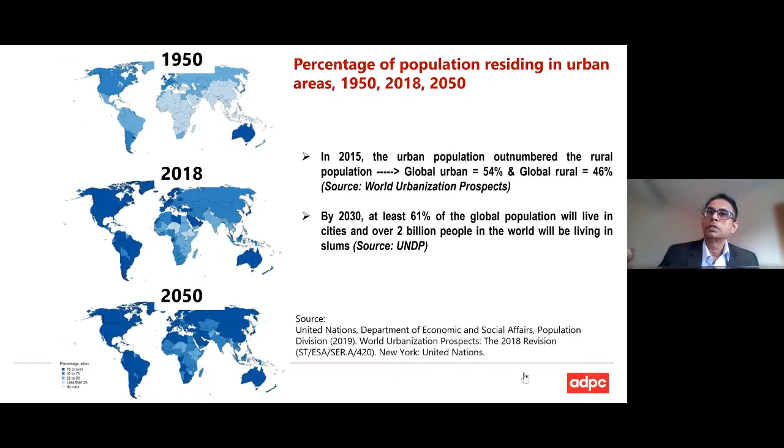So it is very much important for us to think about urban settings, because of the population increase, the growth, as well as the infrastructure, in order to understand and reduce climate as well as disaster risks. So there are a couple of global instruments, what we call global frameworks.

When it comes to disaster risk reduction, probably you all know the Sendai Framework for Disaster Risk Reduction. It was ratified by many governments in 2015, so we have a 15-year period till 2030. It has set four priorities: understanding risk, strengthening disaster risk governance, investing in disaster risk reduction, as well as enhancing disaster preparedness for effective response.

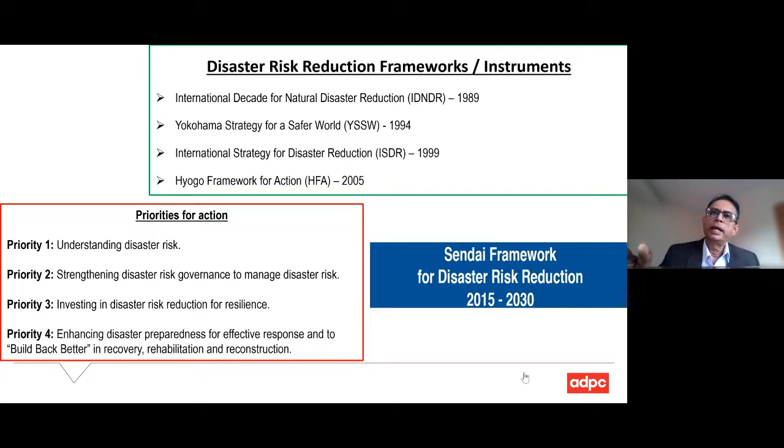So with that, there are a couple of other global frameworks. Everybody knows about the SDGs, Sustainable Development Goals. I've just selected Goal 11, because there are 17 of course. That one talks about cities, and if you take Goal 13, it is climate action.

Let's try to understand what a disaster is. Hazards are of course coming, and in future we are expecting them to be more intense and frequent. It also depends on whether the system is susceptible, if the exposure is high, and if the coping capacity is less, there is a risk. So hazard is coming, and if the system is more vulnerable, more exposed, and has less capacity, that's a risk of disaster.

And if there is any disaster, it leads to losses in lives, lifeline facilities, livelihoods, as well as assets. So this is the popular equation.

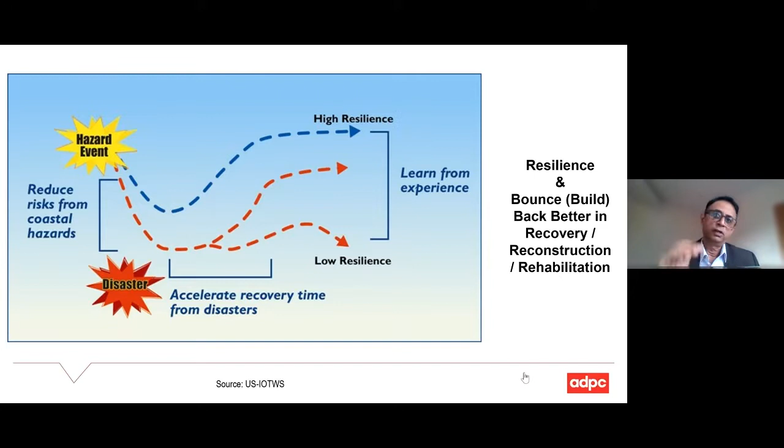If the system is resilient, it doesn't take much time to bounce back to normal level. But if the system is not resilient, it takes more time to bounce back. Sometimes it may not even come back to the same level.

This is the disaster management cycle. You can see the first half is risk management, with certain activities we can take forward to protect, starting with mitigation and prevention, and a lot of preparedness measures. One good example is prediction and early warning systems for national or subnational organizations to issue forecast warnings in a timely manner.

After the disaster, the latter part is crisis management. Once it happens, impact assessment is needed, and the government, CSOs, and other people deploy response mechanisms. Then we need to work on recovery and reconstruction, and with the learning from that, we go back to the protection side.

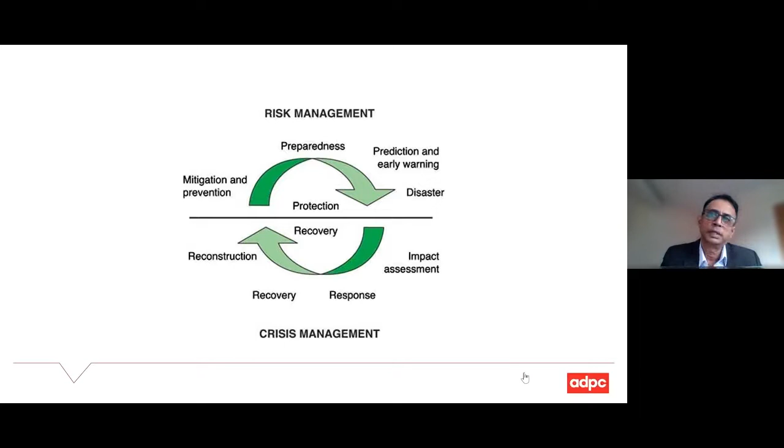As I was trying to mention, we can reduce the risks and protect the people, systems, or infrastructure in a particular area, or in this case, the urban setting. Let's assume in a particular urban area we have SMEs, people, critical infrastructure, or even in suburb areas, the farming community.

As I was trying to explain, these are risk environments. Hazards are there - it could be floods, riverine floods, storm surge, or coastal flooding if the city is near the coast, and strong winds associated with cyclones, or to a certain extent, drought as well. The exposure pattern is also important.

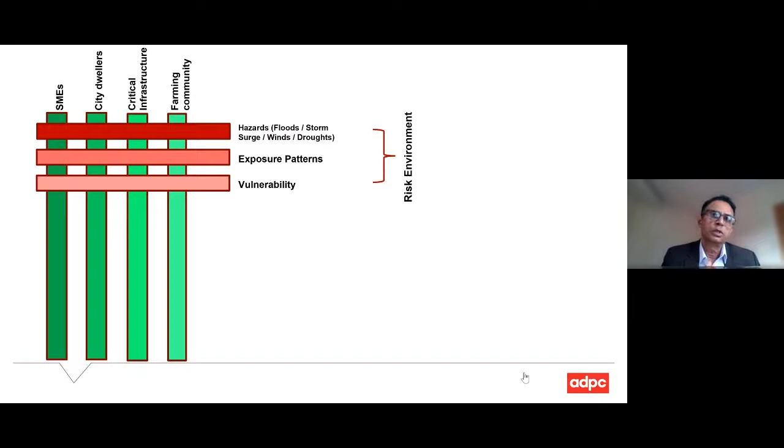In addition to that, there's the vulnerability of that particular system. These are some resilience-building measures. If you want to improve the systems or resilience, there are ways and means to do so. The most important thing I would say is the governance system - maybe people have been working so hard, but if the particular municipality or local area's governance system doesn't really support it, we may not be able to do much.

Land use management good practices are one way we can think of to reduce risks. And early warning systems - of course each country or city has them, but maybe the warning information doesn't really reach the grassroots level on time. So there are gaps, especially from sub-national to local level.

So we need to make some improvement and get private sector engagement in order to improve early warning systems, and build up area environment improvement. This is very much a topic nowadays - we've been talking, and other speakers might also talk about green cities, the concept, and economic opportunities. If you take this all, that is actually very much on urban disaster risk management.

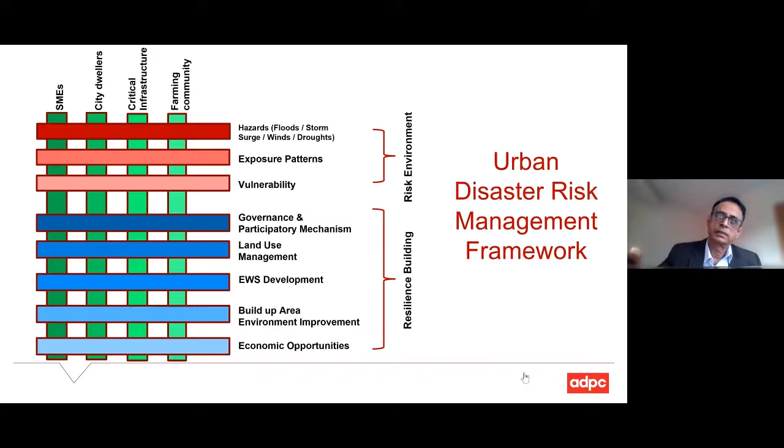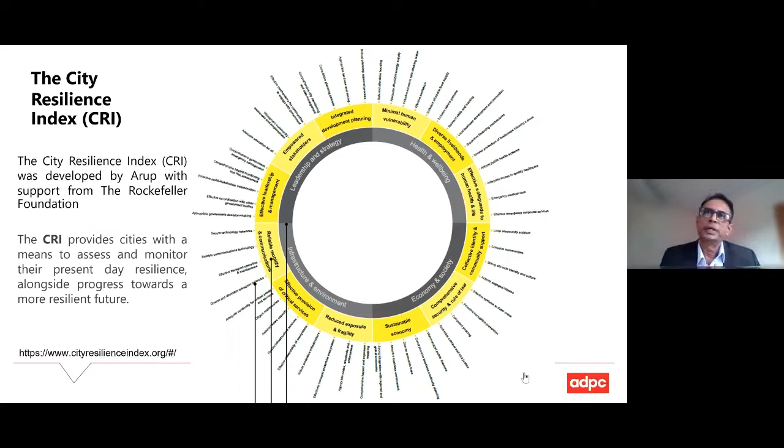This is the framework we have been using to make improvements and reduce the impacts, the risks. I thought of putting this one because I started talking about resilience, city resilience. The city resilience index was proposed by ARUP with funding from Rockefeller. It's a way to measure overall resilience. There are 4 domains, 12 goals, 52 indicators. It's a bit messy, you may not see it very clearly, but this is the overall resilience measuring index.

What I'm going to present now is one of the projects in the Disaster Preparedness Center we have been implementing with funding from NORAD - urban resilience to climate extremes. We have come up with some areas of intervention: improving early warning systems, improving community engagement and readiness, and sectoral preparedness and risk governance. These are the key 4 areas we have put in this project in order to improve.

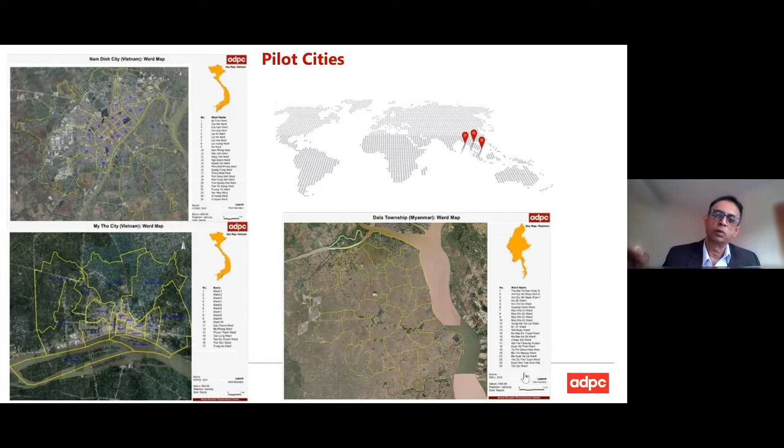It's also important for us to work on knowledge products and peer-to-peer learning, experiences among and across countries. So we have selected a couple of cities - 2 cities in Vietnam, My Tho and Nam Dinh, one to the north, one to the south, but these are all coastal cities - and one in Myanmar, in Yangon. These are the selected areas.

In addition to that, this whole project - it's important for us to exchange knowledge or lessons learned. So we have been conducting several webinars like this one, and we have conducted some trainings as well.

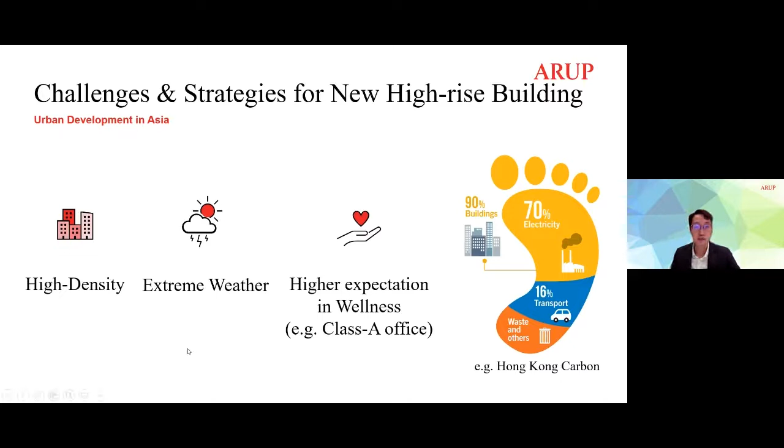So a bit of recap on the sustainable development of the building or urban context. In the year 2000, that millennium year, we focused more on energy efficiency. Then came the next 10 years where we looked at high performance - how we make use of space, how we make the best use of energy to provide the best environment or environmental quality.

And in the last few years, we've paid more attention to people-centric design of the building. You may have heard of the WELL building certification, or we focus on the topic of health and well-being design in the building. And in the recent 1 to 2 years, more of the general public have gained awareness of climate change. So I think this will be the era where we need to look at climate-centric design of a building.

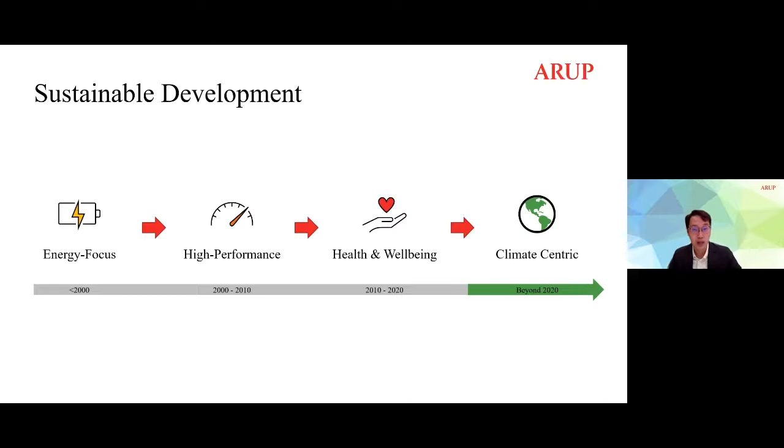So for the new generation of sustainable buildings, I think we need to look at three key elements. One is regarding resilience - how it responds to climate change, how we adapt to the climate change consequences. The blue one is mitigation - we also try to limit the global temperature rise and conduct decarbonization exercises. And the green one is adaptation - how we live together with the change of climate, and also how we change our design and behavior so that it can facilitate the wellness design of a building. So these are three very key elements in the coming years for new building projects.

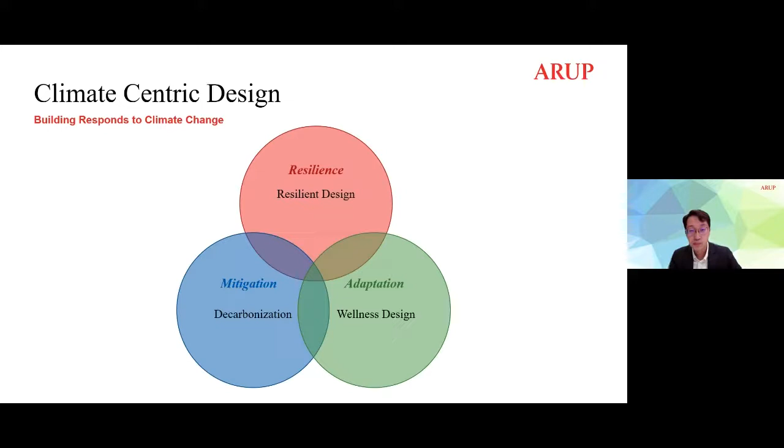So today I'd like to share a case study with all of you. It's a high-rise building in Hong Kong called Swire 2 Taikoo Place. It's an award-winning project that was awarded the Grand Award of the Hong Kong Green Building Award 2021. It's located in Hong Kong - an office building with 42 stories and 15 stories of basement levels. It's targeting certification for BEAM Plus New Buildings, which is the local Hong Kong green building certification, as well as the US-based LEED certification and the WELL certification, targeting platinum. We have already achieved the provisional and pre-certification, and the remaining item is the RESET Air, which is more about the performance of air quality.

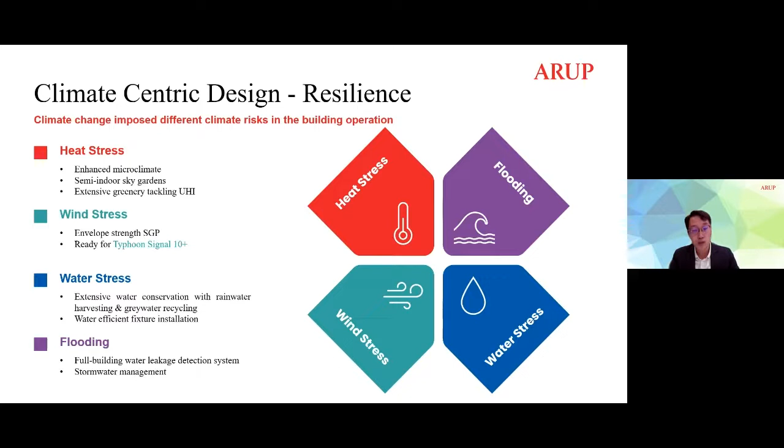So about the wellness design, which is the very high demand from the user nowadays for the urban context. There's mainly two parts in the wellness strategy here in this project.

One would be we call the COVID alignment design, which have a series of the touchless experience. Here is an example that we have the total touchless toilet, for the process that open the main door, cubicle door, or also the flush or the toilet lid. So all are touchless. We integrate this kind of system in the toilet interior design.

And also at the right hand side is very important, is the air quality, which is quite important in Hong Kong here, that's the urban area, where the outdoor air quality may be a concern. So apart from the filtering system and the fresh air system, the HVAC provision, we also include a series of the indoor air quality monitoring throughout the whole building, so that we can have a precise appreciation of the air quality, so we can provide the quick response for those areas where the air quality cannot provide a good performance, so that we can do some control, like the control of the fresh air amount or the air purifier.

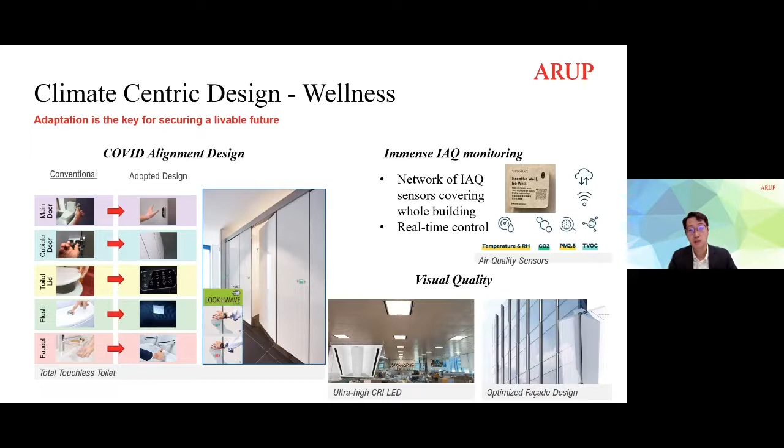And I've just mentioned there are 2 sky gardens put in the building that provide the area with the connection to nature, with the natural ventilation, the greenery, and the view. So that would be the space that can let the user have some leisure activity, and also during office hours have casual discussion there.

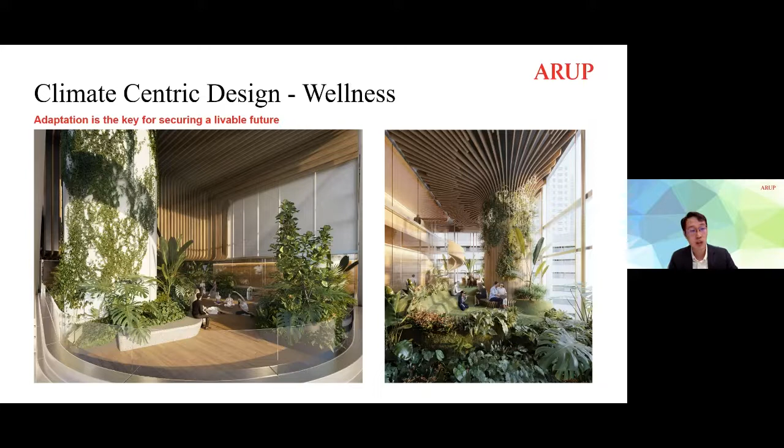So starting with the mitigation, the decarbonization. I'd like to introduce the terms of the whole life cycle carbon assessment that we conduct in this project.

And for the operational carbon, we certainly need to look at the passive design, that's how we work well with the microclimate, and also a series of energy efficiency systems and renewable energy systems, which I will touch on later. And also it's very important to look at the waste management system as well.

During the construction stage, that is also very important, because in the design stage we have specified lots of the materials and systems, but actually during construction, say 4 to 5 years, some materials that we expect may not be available at that time and moment. So we need a very good tracking system, checking on the materials submission from the contractor, so that all the project team can check on the performance. For example, at some juncture of time, the expected concrete from nearby is not available, so we need to buy concrete from a very long distance, and then that will introduce a larger carbon emission. So we should have a very good tracking system to see how the carbon emission performance is at the moment, so we can find any other chance to do it better and make it on track.

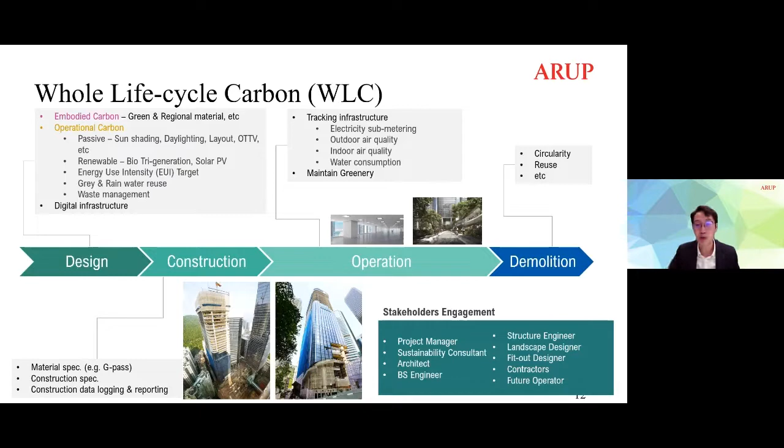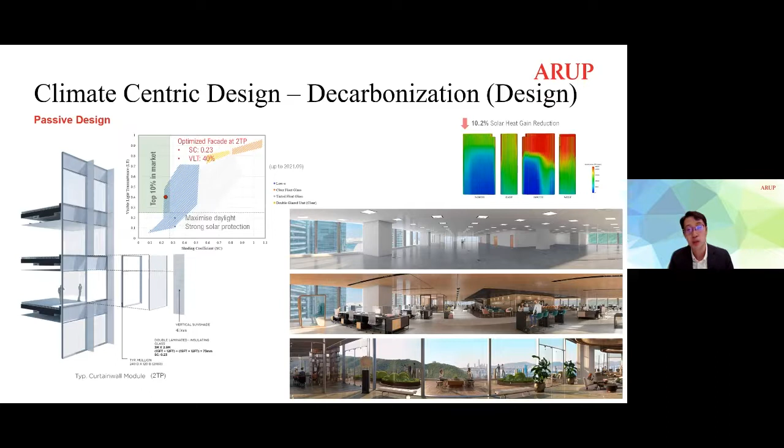So it's quite hard in subtropical Hong Kong to use solely passive design to offset the operational carbon, so that we still need to turn on the air conditioning in the hot and humid season, and also turn on the lighting. So that will be a series of energy efficient systems we consider, no matter in the water side and air side of the HVAC system, and also the lighting and lift and escalator system.

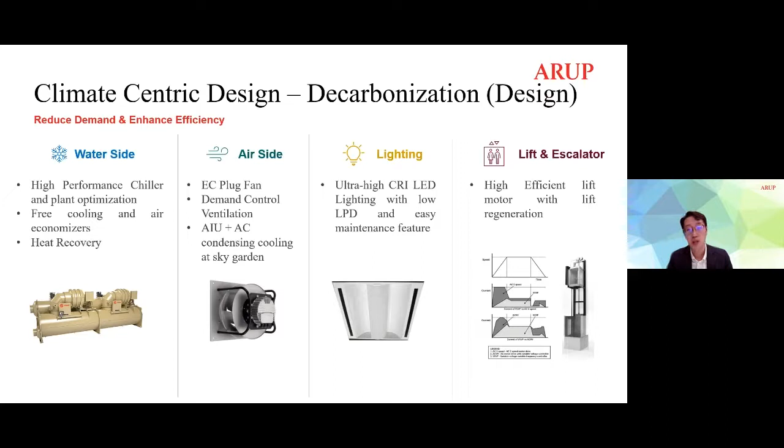The challenge in high-rise buildings is the application of renewable energy, since the roof area is quite limited. So apart from photovoltaic and small wind turbines we apply on the rooftop, we also apply the new concept of using waste cooking oil as fuel. That drives the generator to produce electricity and also heat, which can feed the absorption chiller to provide cooling for the building. That's why we call this a tri-generation system: making use of biodiesel, that is waste cooking oil, to produce clean electricity and also drive cooling and hot water.

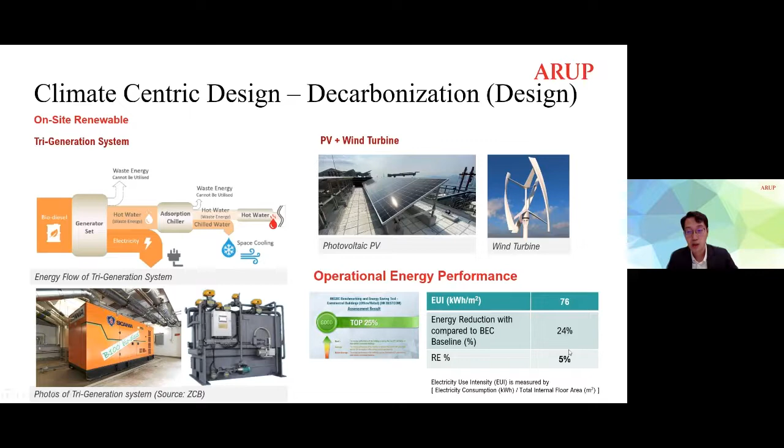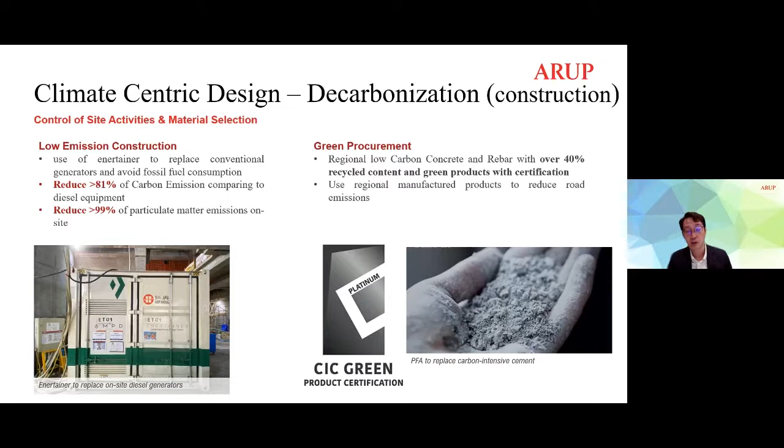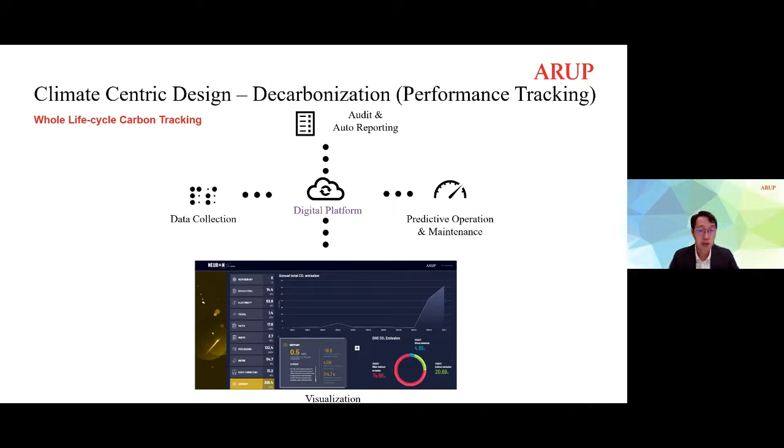Finally, for the operational stage, we have a performance tracking digital system to monitor each carbon emission parameter, to facilitate the operator observing the performance of carbon emissions of the building in the future.

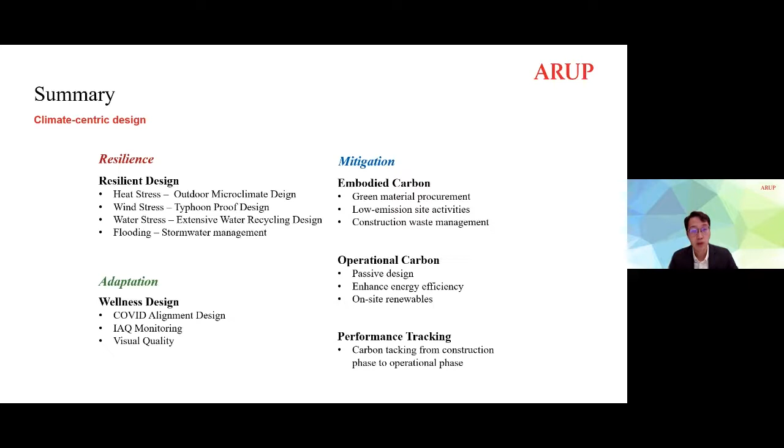So to close up, this is climate-centric design. We consider three main elements: resilience that responds to climate change, adaptation in terms of wellness design, and lastly mitigation, which considers embodied carbon, operational carbon, as well as performance tracking in the operation stage. So thanks, that's my presentation.

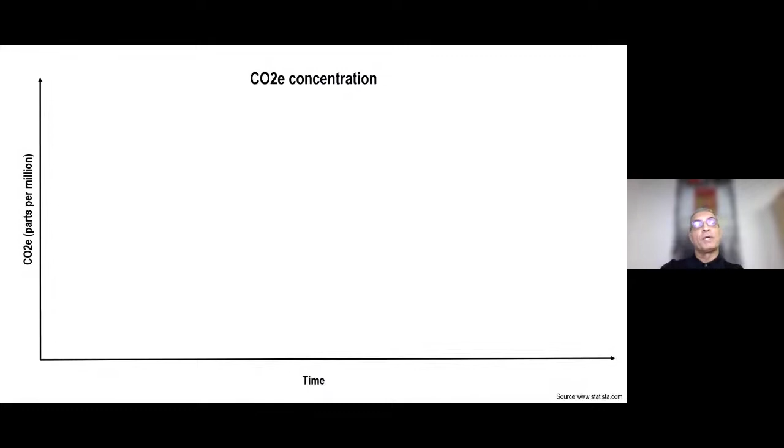Looking at a few drivers, environmental parameters before and after the Brundtland Report, say the CO2 equivalent parts per million, the famous graph of density going up, it's been rising for the past 800,000 years.

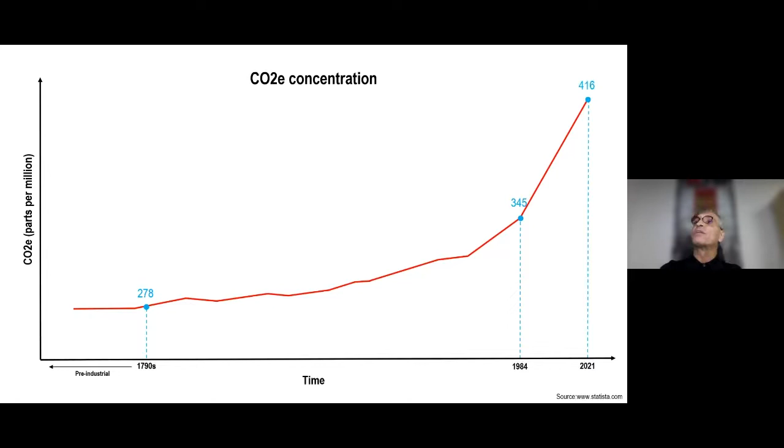Of course it's not the fault of the Brundtland Report. But looking at the past 200 years: in 1790 the number was 278 parts per million, in 1984 it was 345, and now in 2021 it is 416. In about 190 years between 1790 and 1984, it went up by 67 parts. In the preceding 35 years, only 35 years since Brundtland, it's gone up by 71.

The tendency on the right-hand side of this graph, after the Brundtland Report line, is worse than the one before.

Sarah Ichioka and Michael Pawlyn, in their fantastic book called Flourish, intimate that something like 50% of all the greenhouse gases humanity has emitted into the environment has happened after the Brundtland Report.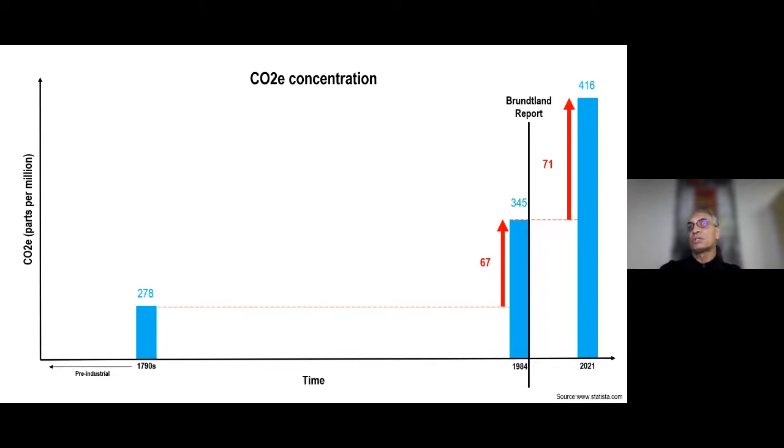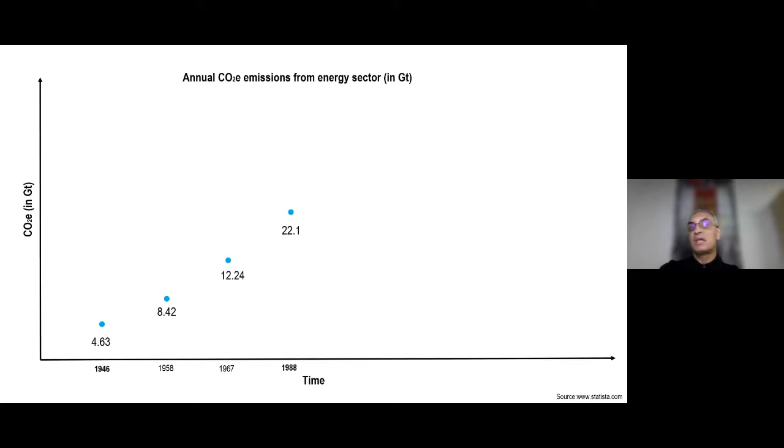Looking at the actual absolute numbers of greenhouse gases in gigatons related to the energy sector, which is a major part of total greenhouse gas emissions: just after the Second World War, in 1946, it was 4.63 gigatons per year. It continuously went up. In 1988 it was 22.1, and now it's about 36.4, coming up to 40 gigatons. You could draw a straight line through it.

And where you draw the Brundtland Report line, the tendency before and the tendency after show no difference. There is no discernible difference in our behavior, in our actual work to reduce our adverse impact on the environment. There's no change noticed in the data and the facts.

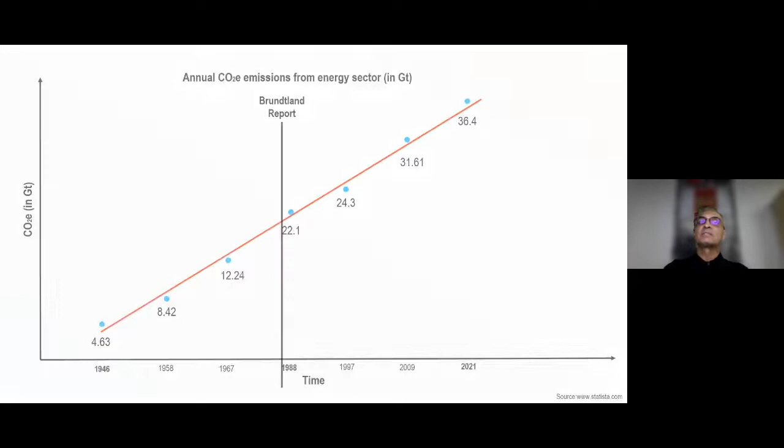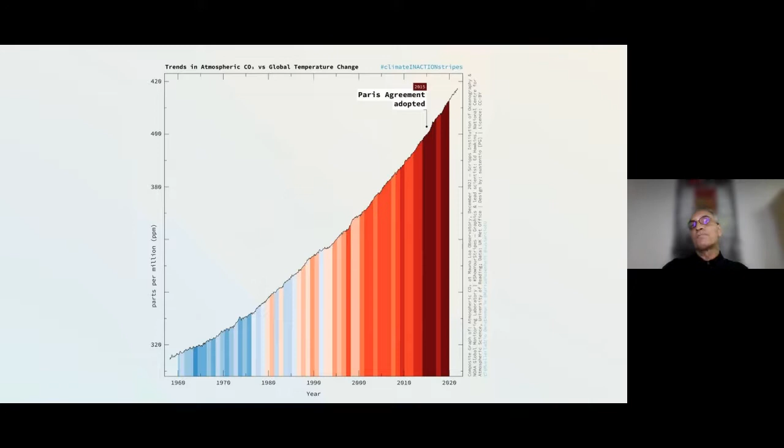The graph that you've all seen, again parts per million, going back from 1960 till now, shows various initiatives by very good, well-intentioned people: the First World Climate Conference in 1979, the first IPCC report in 1990, the first UN Climate Change Conference in 1995, the Kyoto Protocol, the Copenhagen Accord, the Paris Agreement, and as recently as last year, COP26.

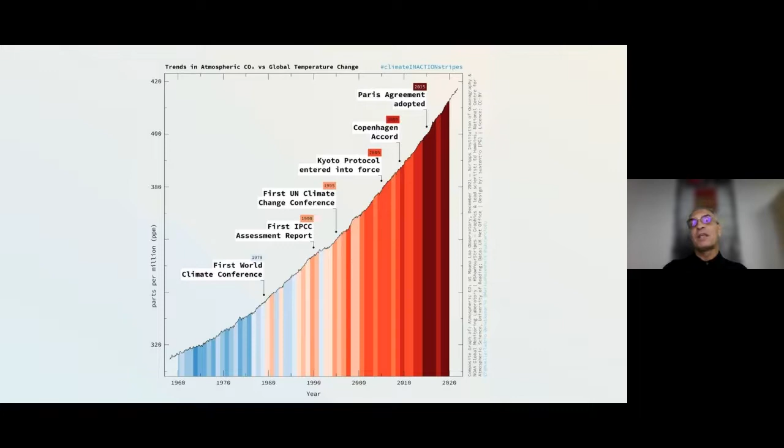You see, all these initiatives are happening as if on a different world, on a different graph. The impact on the environment is not discernible alongside them. I just wonder whether we are deluding ourselves that the work we're doing is actually getting us any closer to a proper solution to our environmental woes.

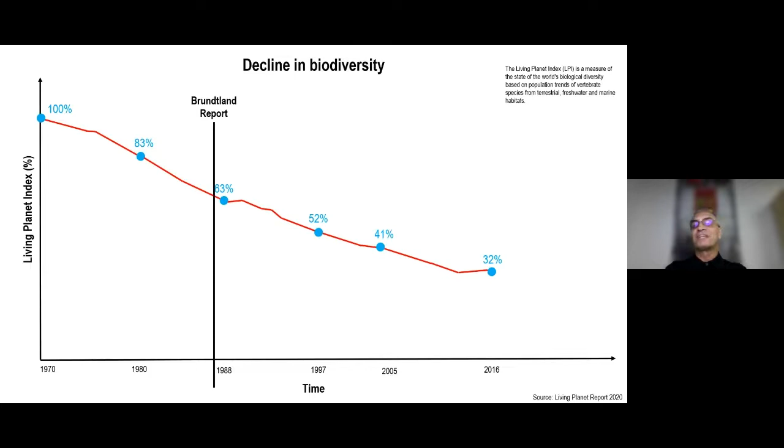Another driver, biodiversity, has gone down. It's been decimated. Since the 1970s it's gone down by 68% on average. In some areas, the Amazon forest has gone down by 94%. We've decimated biodiversity, and the Brundtland Report is right here—before and after it, there isn't any discernible difference or tendency. Global loss in forest area since the Brundtland Report is a straight line going down.

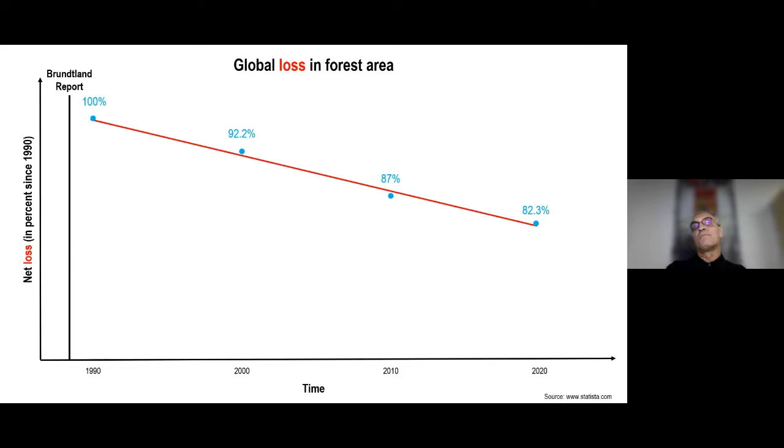I'm not saying the Brundtland Report is contributing to this. Maybe it is, maybe it isn't. But it definitely doesn't seem to be having any major effect on reducing it, if it ever intended to do that. So having said that, wherever we were and where we are now, we obviously have a choice. We can either continue along these lines of sustainable this, sustainable that, certification here, certification there.

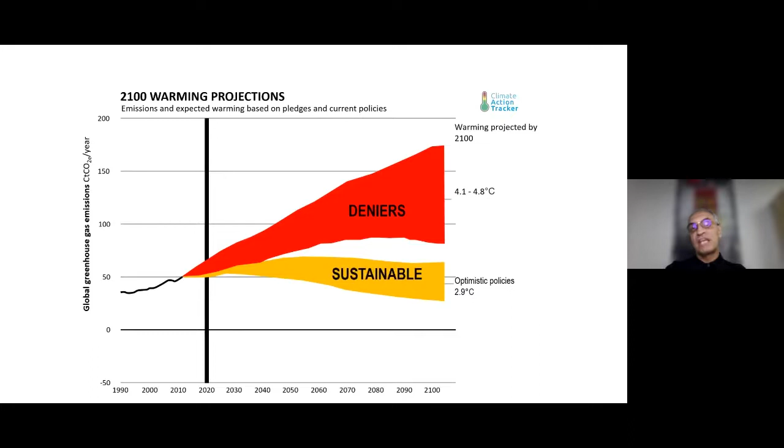There is a path of the optimists, which is a sustainable one. Don't be as bad as doing nothing, do something, be less bad, as it were. The temperature rise projection is about 2.9 degrees.

As you probably all know, if all the promises made at COP26 are delivered upon, the projected temperature rise is 2.2 degrees. And we know from past experience that not all the promises will be delivered upon. So we are looking at 2.9 to 3 degrees with our best endeavors at the moment.

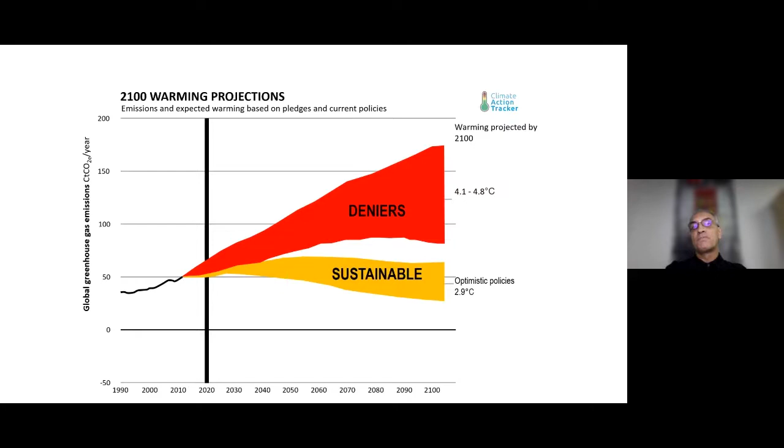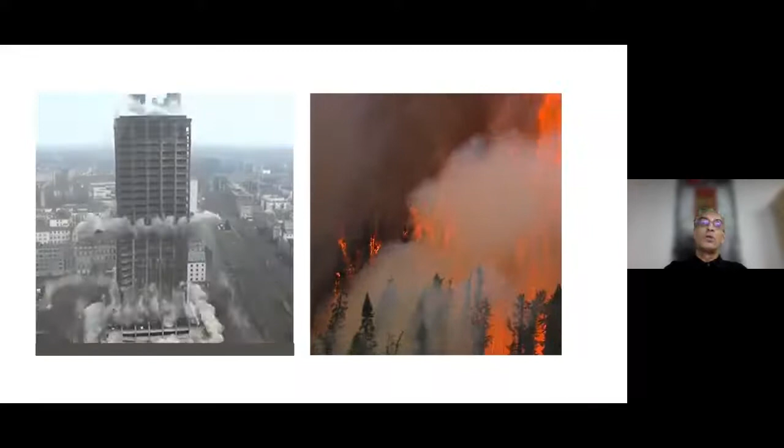Not good enough. Within that, construction waste in 2025 is going to be 1.1 billion tons every year. We can continue to demolish buildings and build new, spanking new ones with glass facades, etc., which has the same effect on the environment as if you're setting fire to forests.

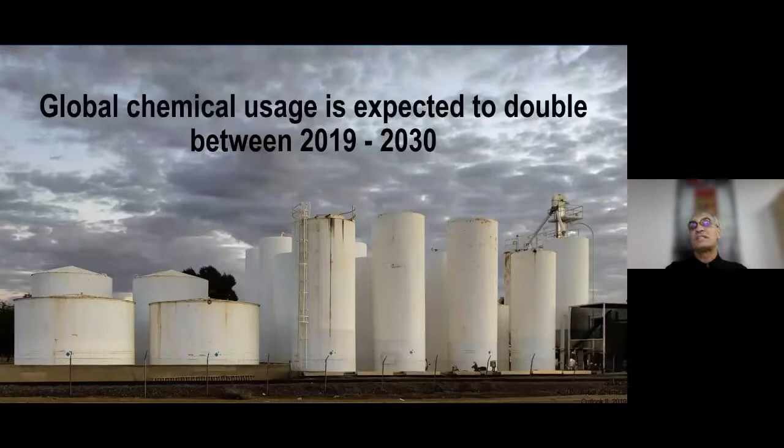The global chemical usage is expected to double between 2019 and 2030. In 10 or 11 years, it's going to double. Most of it is toxic chemical, and a big chunk of it is related to the construction industry. So that is the path of deniers or the sustainable path, if I may intimate with you.

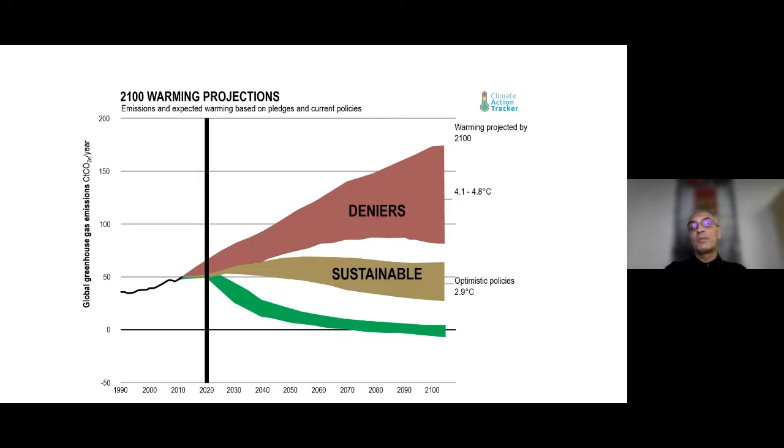There is, however, another path, as we know it, and that's the path to 1.5 degrees, the path of regeneration, the regenerative thinking and regenerative design, which is completely different from the curve and the graph of the sustainable design that we have been pursuing.

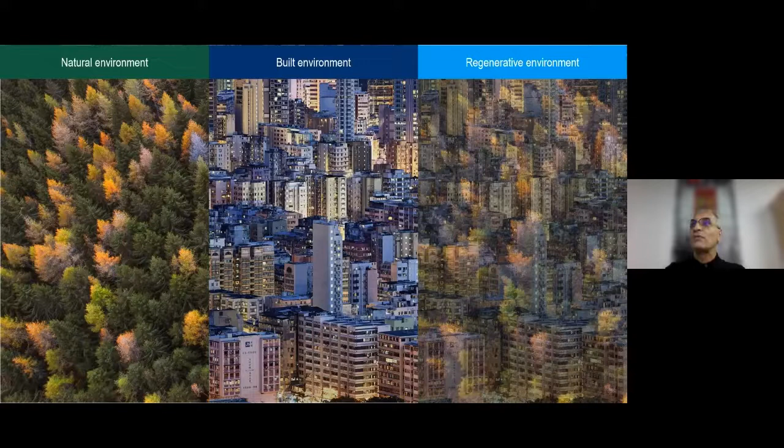Now, on the curve of sustainable design, where we have been for many years, the lexicon and the metaphors are still talking about conventional materials, but maybe replacing a little bit of this with a little bit of that, becoming a little bit less bad. They were still talking about gas maybe not being as bad.

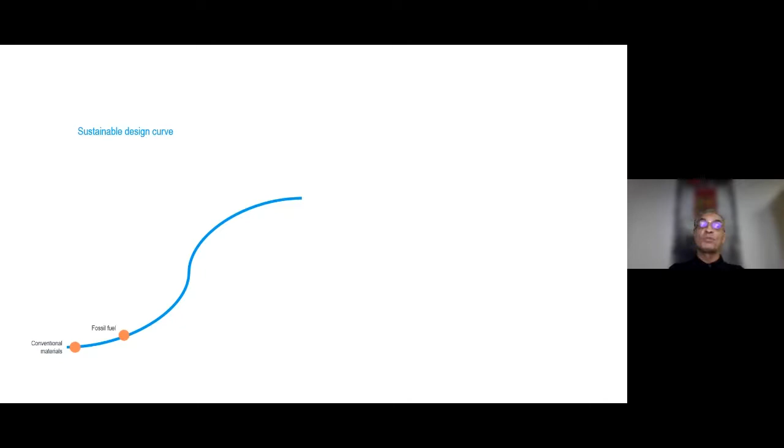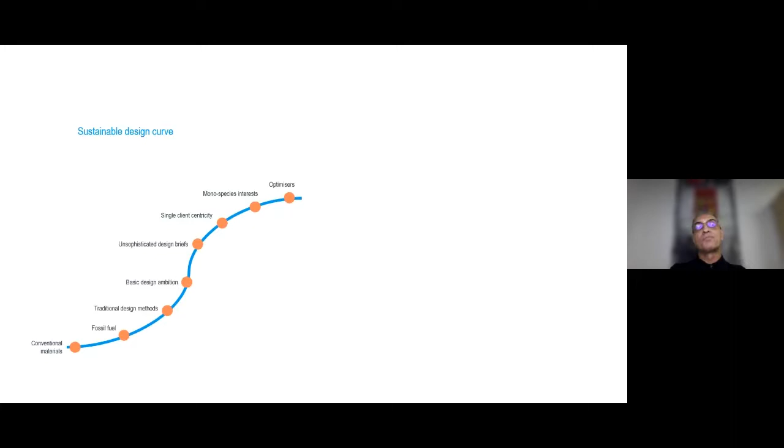We should be talking about the traditional design methods, basic design ambitions, single client centricity, monospecies interest, etc. Basically optimizing our inefficient and bad practices that we have developed and have become experts on.

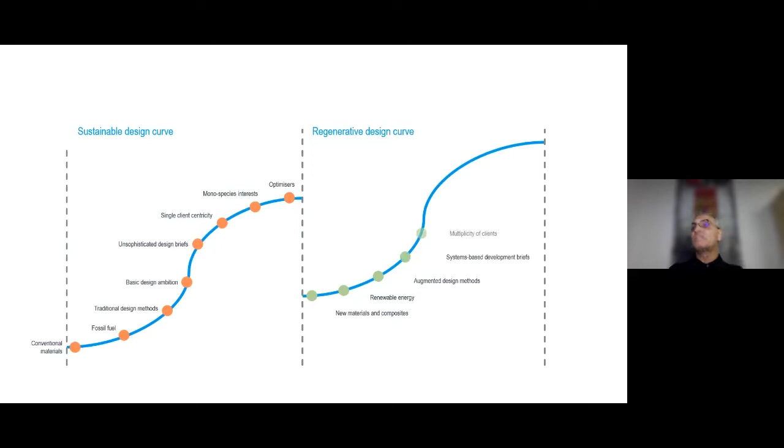Whereas on the regenerative design curve, the lexicon is completely different. We're talking about new materials and composites with a vengeance. We're talking about renewable energy. We're talking about augmented design methods, systems-based development brief, multiplicity of clients, etc. Interest of the unborn, and symbiotic relationship with other disciplines, and that is the path to 1.5 degrees.

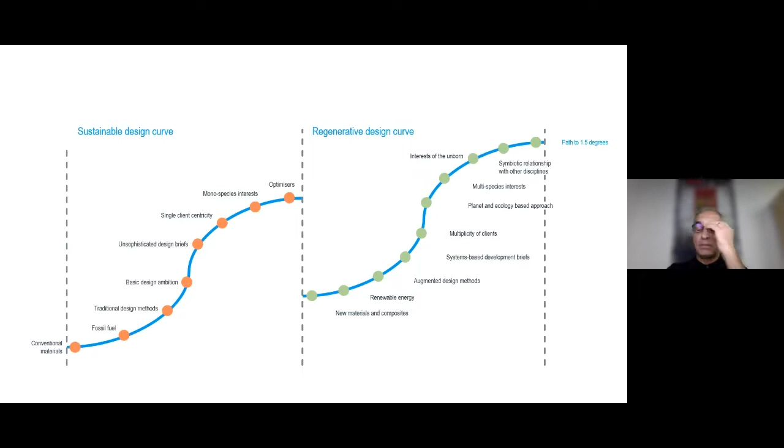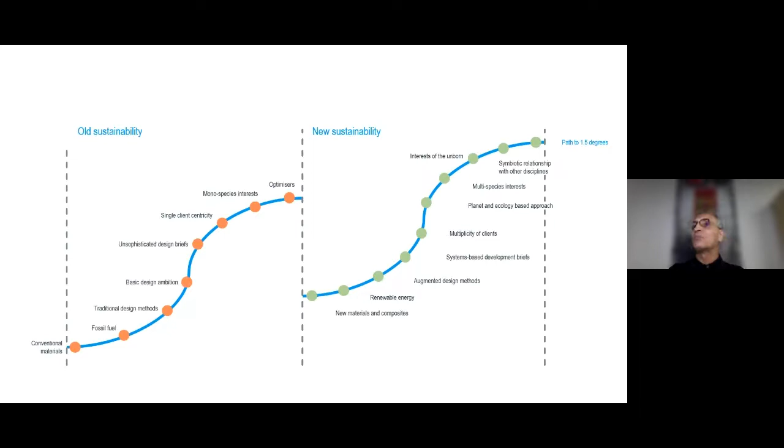Now, if you're all fixated with the word sustainability, I have no problem with that, but maybe we can call the curve on the left the old sustainability and the one on the right new sustainability, but it is not a continuation of the same curve. And of course, we have a choice not to be negative about things, and the choice is to be thinking and designing along the line of regeneration.